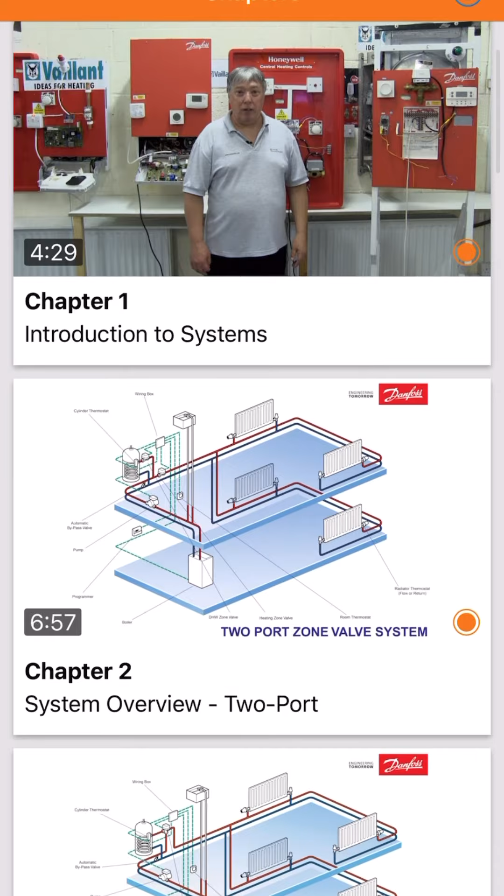So I've got loads of bits and pieces on this one here to help you out with different bits. You can get these Mr. Combi ones in like a pack. I think you can buy like 5 of the apps for a certain price, I can't think what it is, but you can go into it and it will run through all your different how to test, what to test, blah blah blah.

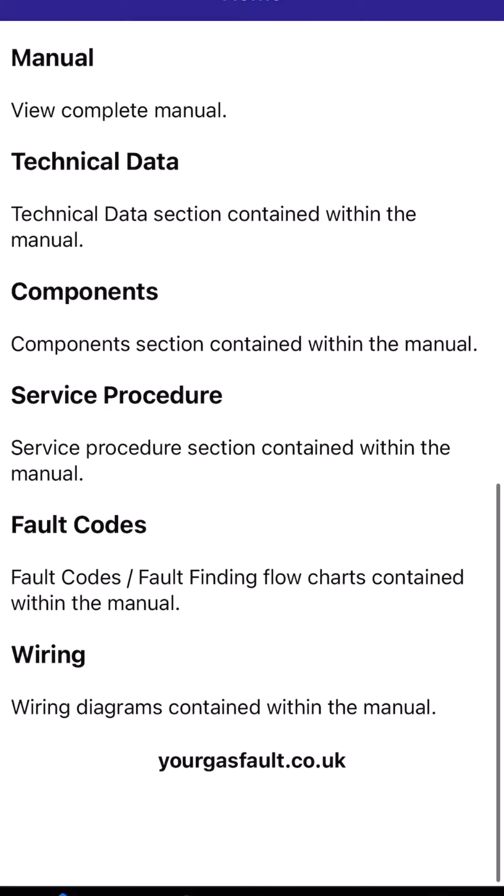So I've been through all of these because I thought they were great and they really did help me with my wiring. I've got Your Gas Fault, I haven't actually signed up to this one I don't think anyway. I haven't subscribed to this one as of yet, but we will do.

And then other stuff as well. So I've got a section on here for files, and in here I've got everything on my iCloud drive. So I've got everything from my insurances, everything that I need, work out, stuff like that.

So basically I've got Worcester Technical, bits and pieces that I download from a manual or whatever. It might just be a key bit of information. Obviously this one is just on the boiler because I just want to know about it when I'm working on it. There was bits and pieces, so what's this one?

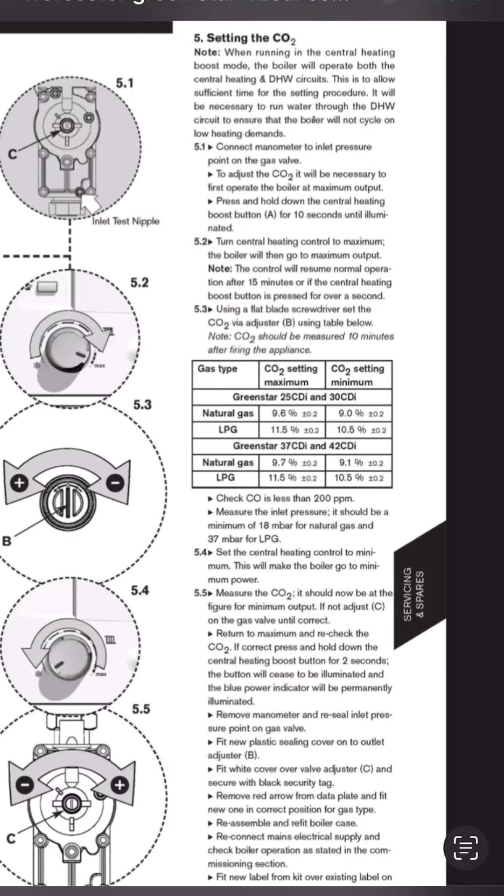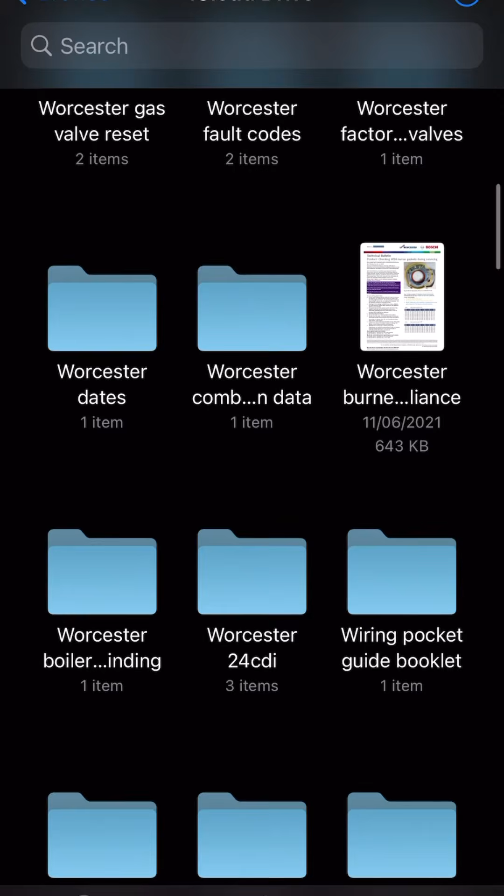I think this one is literally just how to adjust the CO2 ratios on a Worcester Greenstar, and gives you all the readings in there of what you're looking for and all that. So I just take little sections of what I need for that. Technical data on the Worcesters, for instance.

What else have we got on here? Vokera, must have been a bad day picking up that job. But yeah, what else have I got on here? Vaillant, so this is what I was sort of like looking at as well. It was like all the S codes, so I keep all these on here as well, so you can see what you're working with.

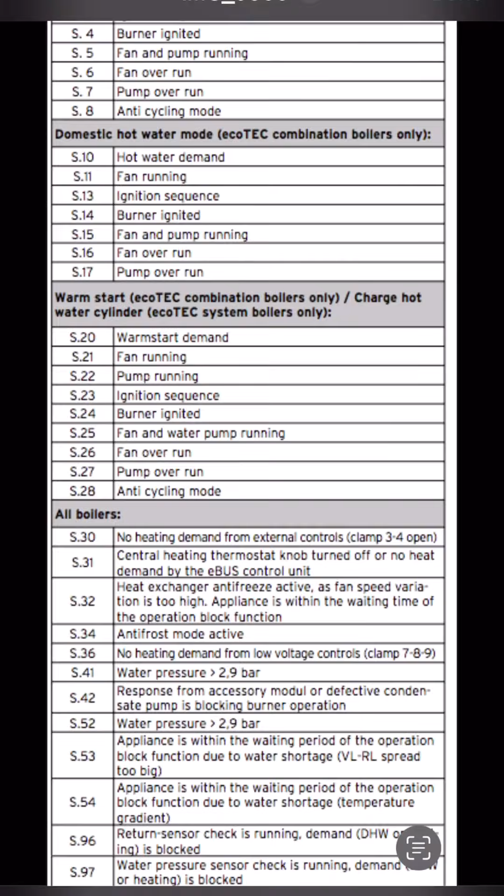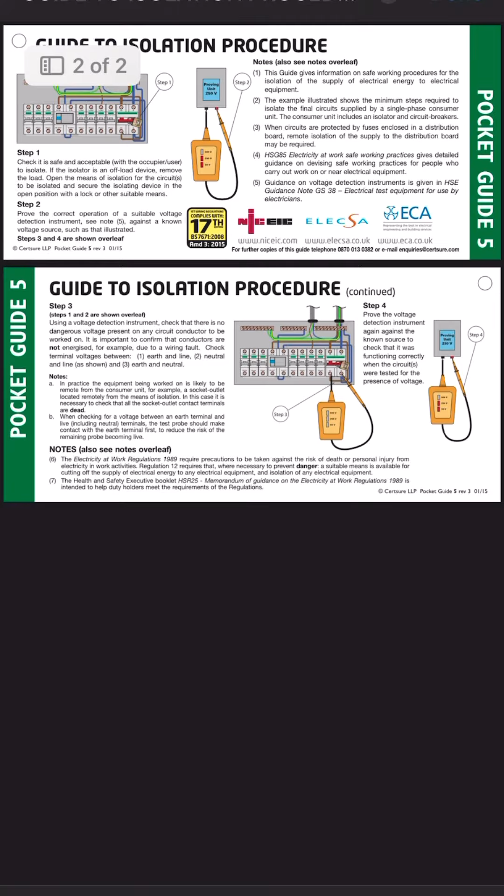And then where is it? Unvented, what have we got in here? So this is basically just a whole manual on the unvented systems and all that stuff. What else have we got here? Safe isolation guide. So we've got loads of bits and pieces, and the list just goes on really.

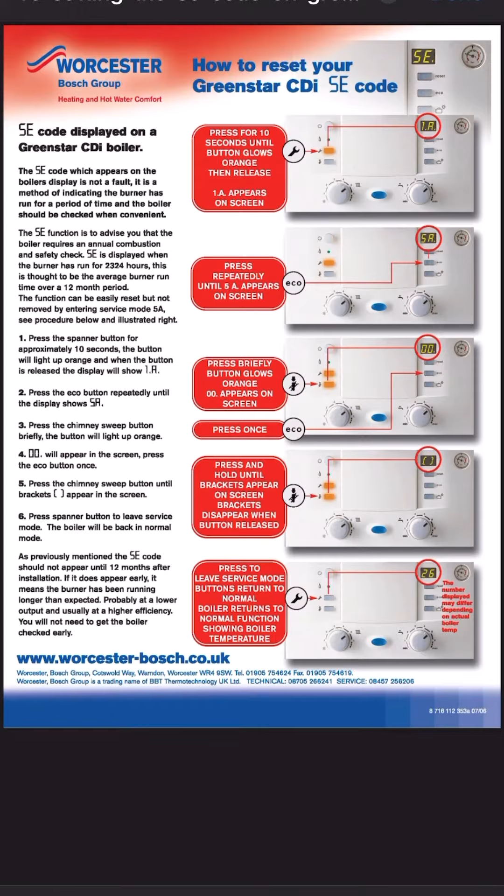How to reset the SE code on a Worcester. I've done a video on that in the past, but it just gives you the actual rundown of how to do it. What else have we got on here?

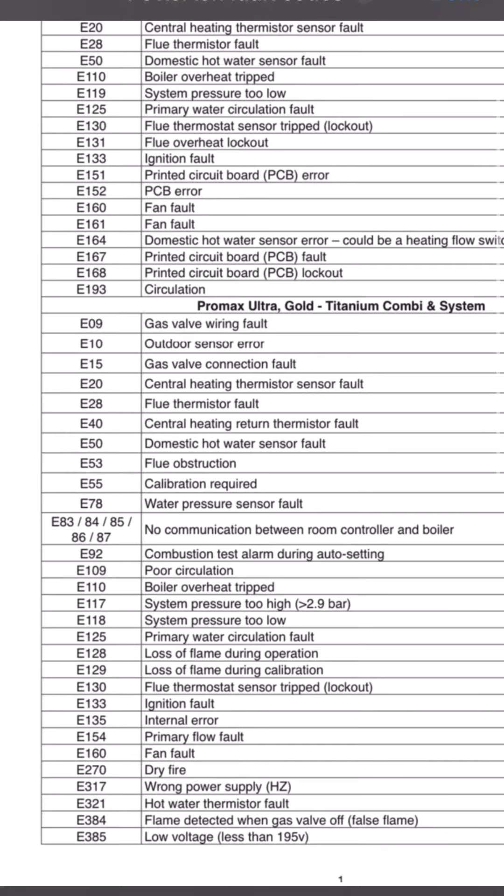So again, the most common fault codes like E133 on there and all that sort of stuff, and it might just give you an idea of what you're looking for.

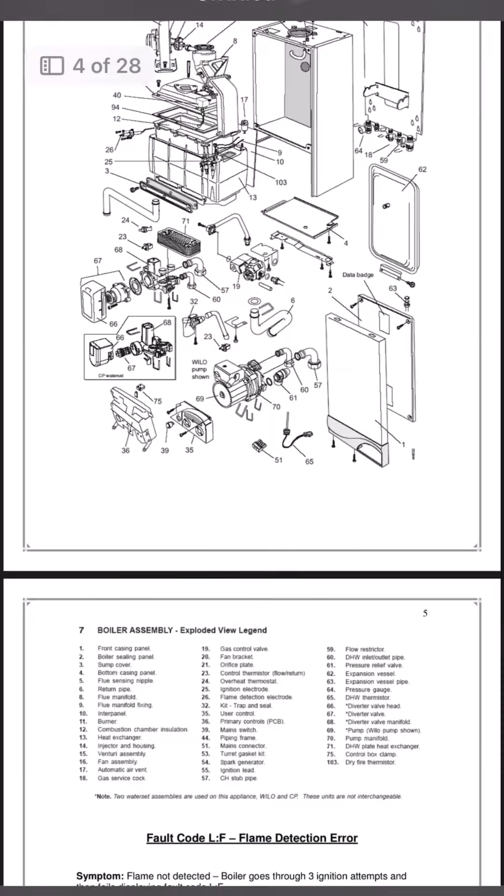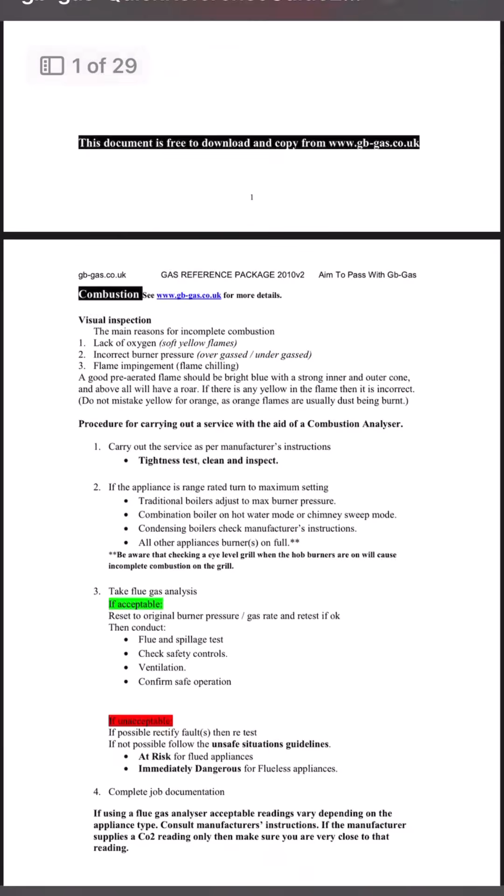What else have we got on here? Ideal ISR fault finding. So there's just loads of random bits and pieces that will get you out of trouble, and it's just what I look up when I'm here, or when I pull up to a boiler and I'm not too sure, I haven't worked on it. I've usually got something in here, just like a quick reference guide.

Obviously the majority of this I know now, but it was handy to keep at the beginning. All my certificates, boiler fault codes, so anything that I come across, I just download it, or I'll screenshot it.

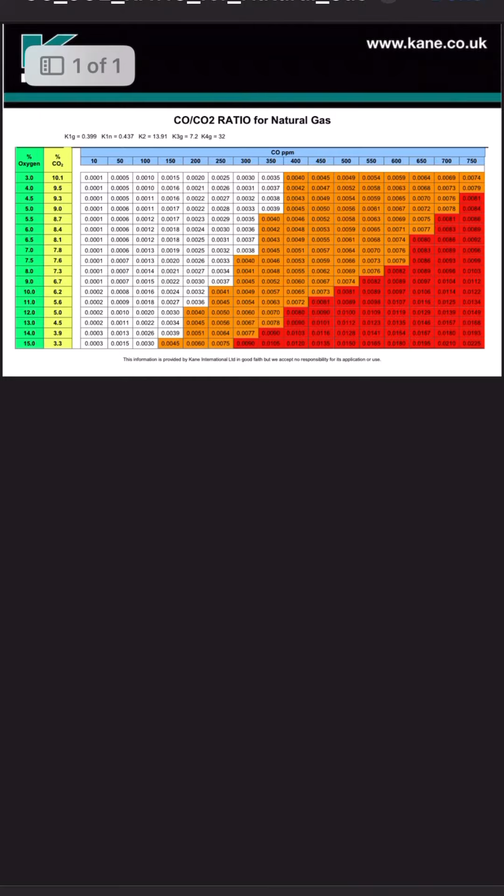Whatever it is, CO CO2 ratios. What's this one? Oh, it just gives you what your ratios will be at certain times.

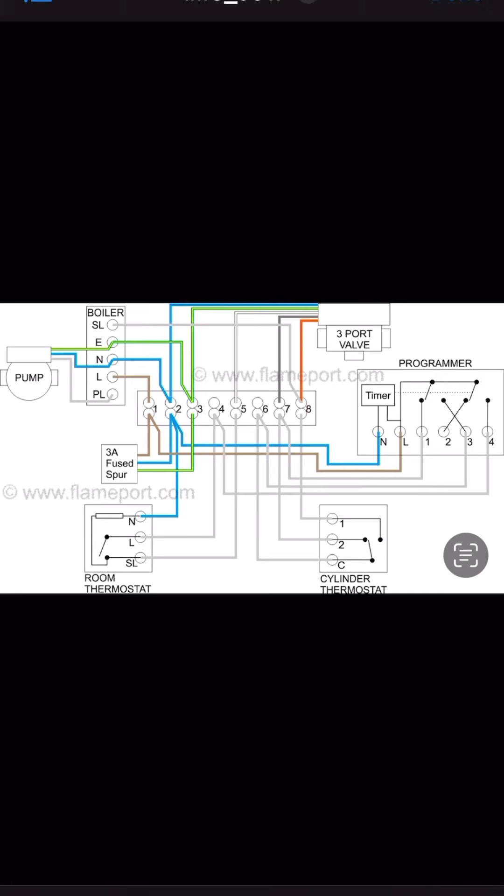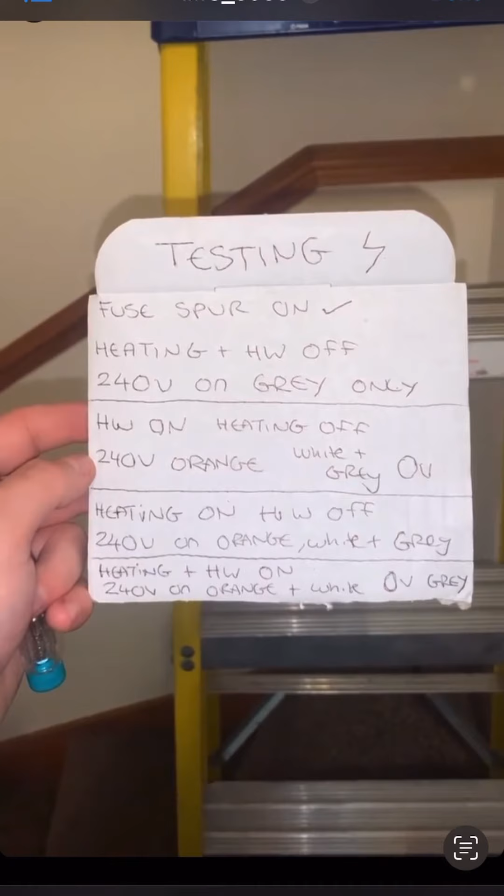Yeah, there's loads of bits and pieces, obviously the main ones being about wiring. So I've got wiring diagrams on here for the 3-port and the 2-port, but I've also got these key bits for testing. So fuse spur on, heating and hot water off, you should only have 240 on the grey. Hot water on, heating off, 240 in the orange, white, and grey 0. So it just gives you a real good understanding.

Quick guides into it, but I thought I'd just do that for you. I hope that was interesting, and I hope you see the bits and pieces that I use. That usually gets me out of trouble. Most boilers that I go to, I'll end up downloading the manual and just trying to work it out through that, because it will give you a wiring diagram and some hints and tips.

I've just finished my day up with a toilet unblock in Shepherd's Bush, nice easy one. Yesterday I finished up just fixing a leak as well, which I'm going to add in now.

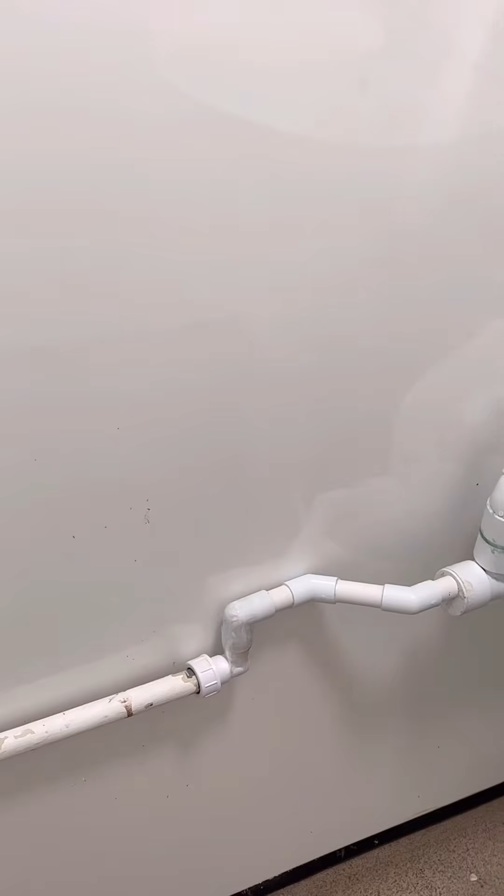Just doing a job for a friend of mine at a restaurant, looking at a leak basically. You can see there's a lovely junction of pipework here, but I've been pointed in this direction here, so we will see what's going on.

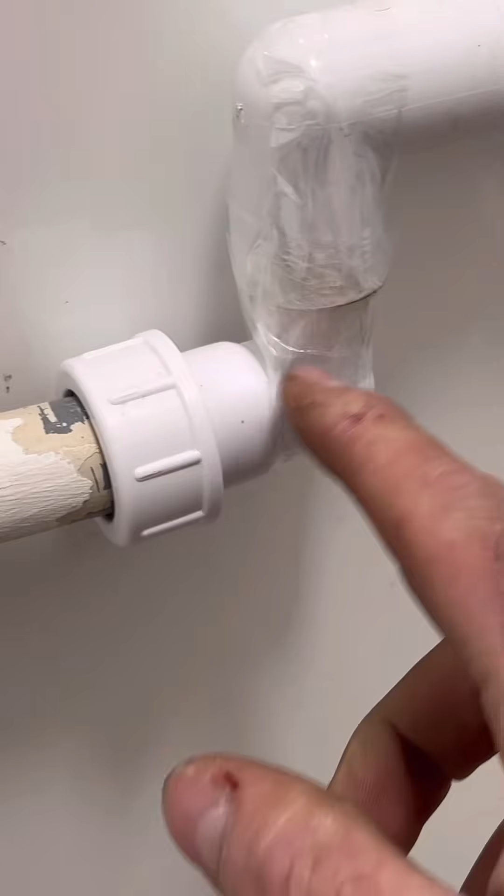I'll take this off here, and I'm probably going to assume that the glue hasn't gone off there, so I'll probably snap that back out again and re-glue it with a new elbow or whatever, but we'll see what's going on in a second.

Yeah, that smells absolutely delicious. That is not nice.

There we go, we can see the problem. The glue hasn't gone off there. I'm just wondering if this is even glueable. Not too sure it is.

Get the old Knipex knife out, just cut this tape off, because the lady's done quite a good job. Yeah, so they've not used a glueable fitting in there to try and join on, but this side is too big for a normal condense fitting, so I don't know what I'm going to do yet.

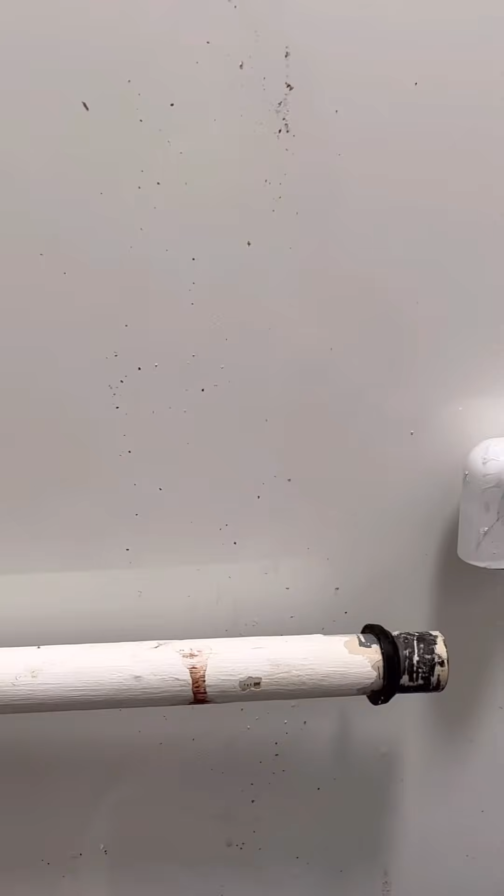Right, so just looking at this, I know it's been installed wrong, and I was like, what the hell's going on here? As you can see, this is taking a step up before it goes into the waste, so okay, that's wrong. But at the minute, all I'm here to do is just fix the leak. As you can see, it comes through the wall further down and isn't fitted right. So I thought about maybe trying to get it to join up that way.

But to be honest, what I'm going to do, I'm going to leave it as it is, but I just need to fix this leak. So what I've got is a coupling. What I'm going to do is cut it further back and then join and glue it in, and then that should be fine.

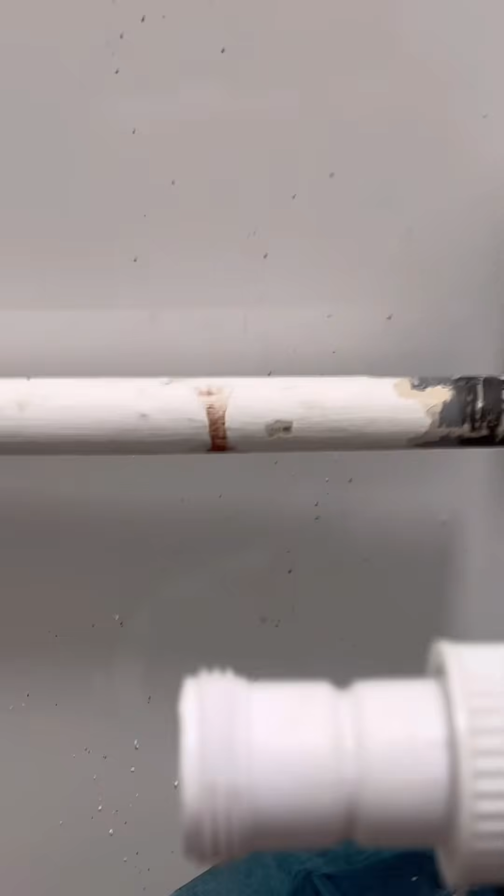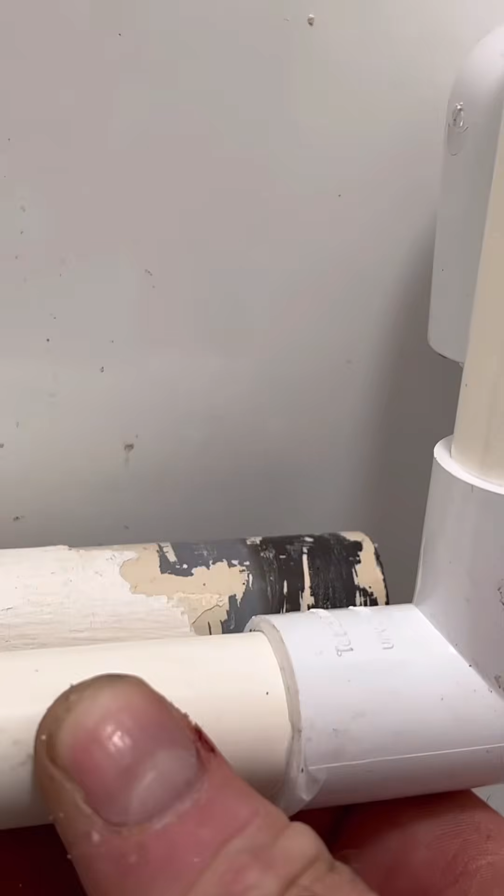Right, so as you can see, this is kind of what I'm going to be doing. So I'll mark up here, and then I'll cut down this stub here to make it work a little bit better. I may try and bring it up a little bit higher, but it's not going to make any difference. It's completely wrong, so pretty much this whole section is going to have to be redone.

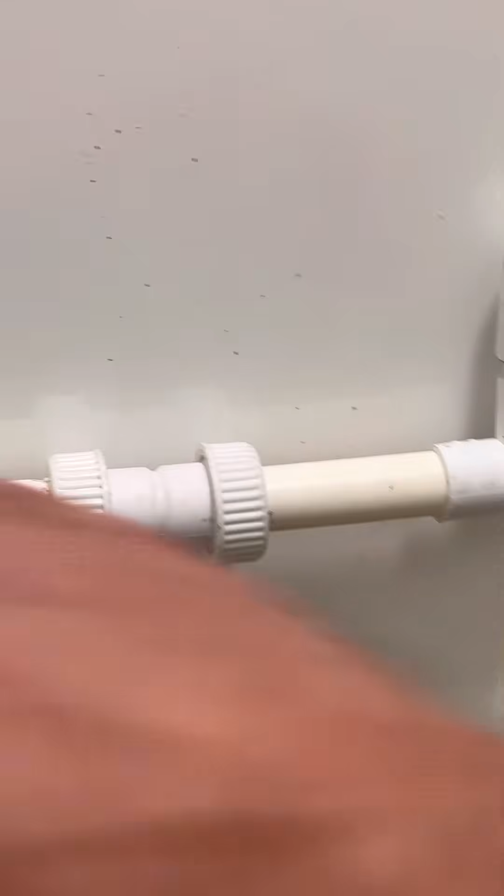Right, so this is my temporary repair. I'll be coming back at some point, I'll let them know what needs to be done. As usual, I've cut myself, which I'll clean up. But yeah, so that's it done, just a little temporary repair. Obviously, as you can see, what was used before, it's never going to glue, that would never hold.

Yeah, I'll keep that fitting. Yeah, obviously bill for that.

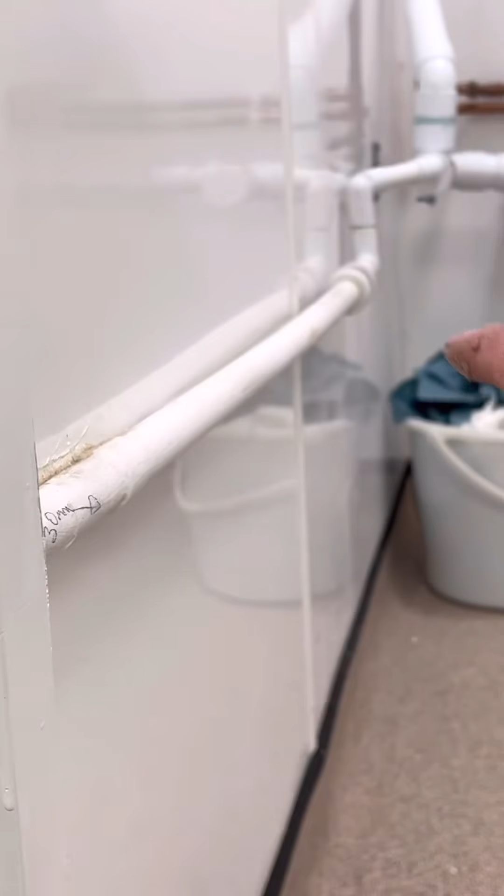Right, so this pipe comes up here, mate, and goes along. As you can see, it goes up, so I don't know whether it's under any pressure or not, I ain't got a clue. But it looks to me like it's been fitted wrong. Obviously, what was done before, they'd used a non-glueable fitting into a glue fitting. So I've just swapped that out, put a new elbow in, new bit of pipe, and this compression coupling in here, which should be absolutely fine now.

So again, this is another one of them jobs at another restaurant, blocked toilet. So hopefully I can clear it. Got my plunger, so we'll get into it and see what's going to happen.

Yeah, let's go. Oh, that was the quickest, easiest one I've ever done. I got a free coffee out of it, so that was a bit of a result. Literally just one push down, filled the water back up inside, another plunge, job done. So yeah, and I've driven into lovely Shepherd's Bush for that one. So on to the next one.